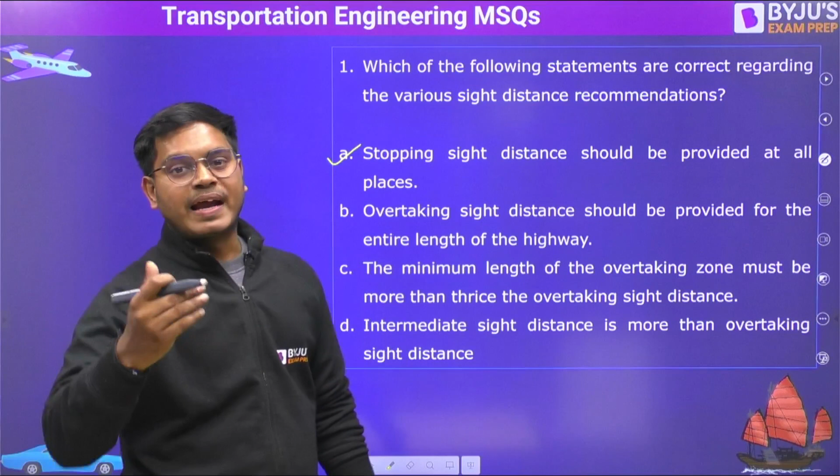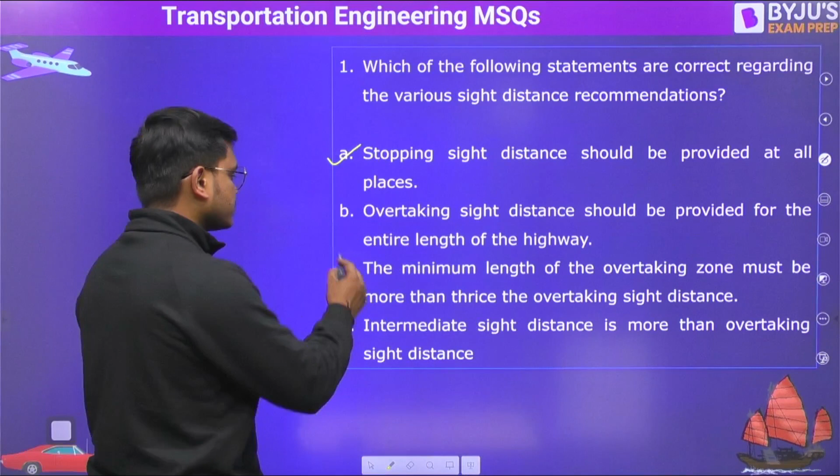Number 2, overtaking sight distance should be provided for the entire length of the highway - but overtaking sight distance is required only where needed, not everywhere, so this is not a correct option. Minimum length of the overtaking zone must be more than thrice the overtaking sight distance - that is also true. Desirable is 5 times, but minimum is thrice the OSD. Intermediate sight distance is actually less than the overtaking sight distance. I hope you have got the right answer for all these options.

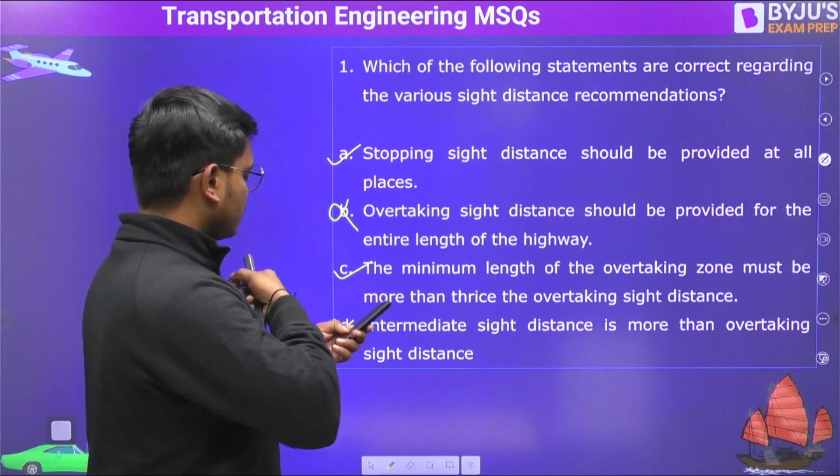Moving on to the next question: which of the following statements about the Bombay plan is correct? As you all know, there were 3 plans and the Bombay plan is one of them. Number 1, the road density is 82 kilometers per 100 square kilometers area.

So it is actually not true, because in the Bombay plan, the first one was in Nagpur, which had 16 kilometers per 100 kilometers square. Here you should have 32, not 82. So 32 is the answer, but this is the wrong option.

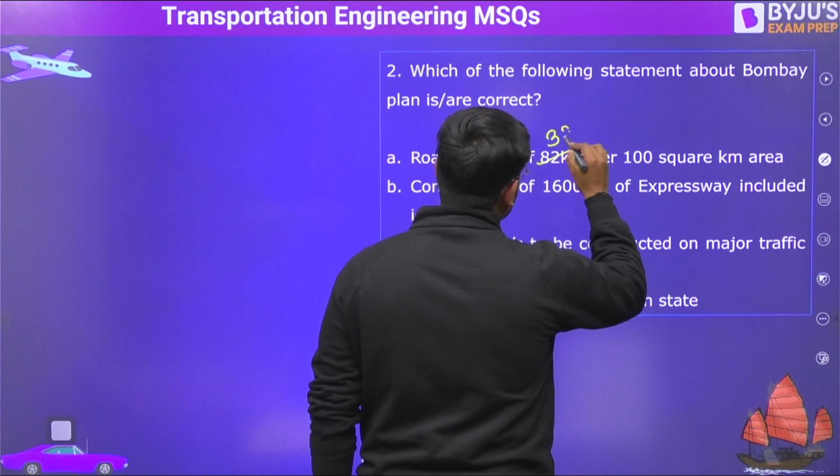Construction of 1600 kilometers of expressway is correct, because in the Nagpur plan there was no plan of having an expressway, but here they had the plan. Expressways to be constructed on major traffic corridors - this is not at all the right option. But traffic engineering cell in each state is going to be there - this is the point we generally don't discuss when studying transportation engineering. This is also right. So option B and option D are definitely correct.

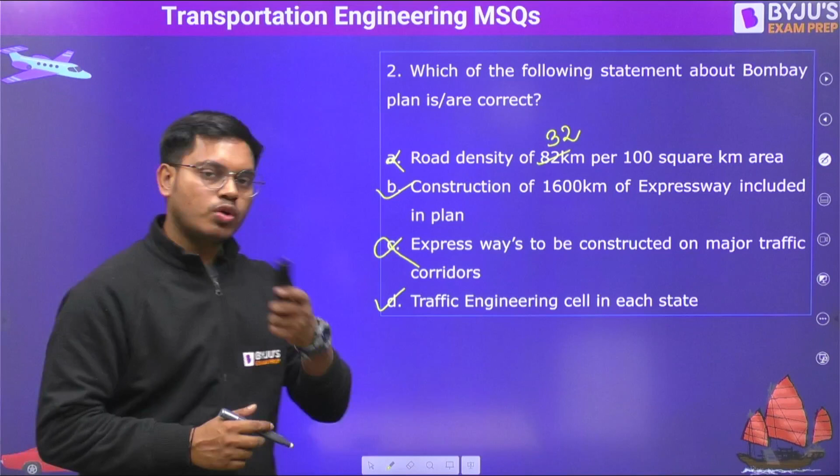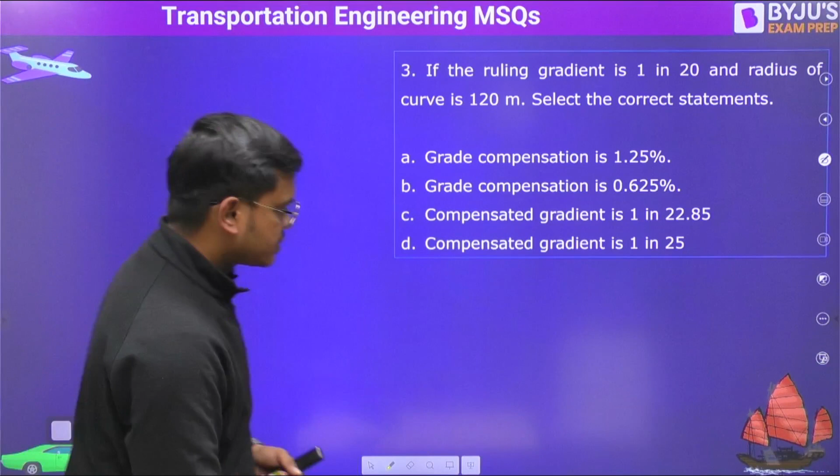Moving on to the next question - please pause the video and try to solve this. If the ruling gradient is 1 in 20 and radius of curve is 120 meters, select the correct statement. As you all know, there is this method, and you need to first find out the grade compensation, which is 30 plus r by r, or 75 by r, whichever gives you the minimum value is your grade compensation. So 30 plus r by r - radius is given to us. Radius of the curve is given as 120 meters. So please put this value and tell me what is going to be the answer. I'll also solve it with you, but you can pause the video and solve it yourself as well.

So it will be 150 by... giving us 1.25 and 0.625. These are the two values. Now, as I have discussed with you earlier, you have to consider the minimum one. So this is your grade compensation. But for that we need to first check the compensated gradient as well. Compensated gradient will be the present grade you are having, the ruling gradient, minus the grade compensation. Now you have how much?

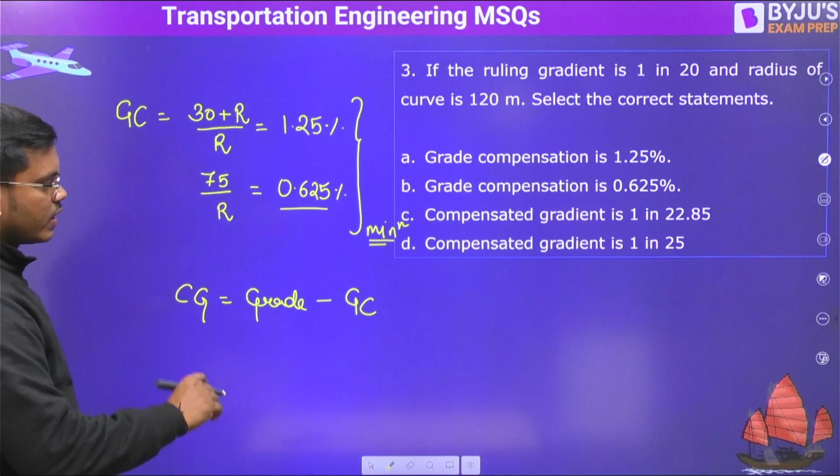1 in 20, right? So if you go for 1 in 20 and subtract 0.625 from that, you get the value as 4.375, which is greater than 4%. So obviously this is the right answer, there is no problem. 4.375 is also 1 by 22.85. So option C and option B are correct - grade compensation is correct and compensated grade is also correct. So these are the two options which are correct here.

Moving on to the fourth question, select the correct statement. When the vehicle is moving up gradient, braking distance decreases. When the vehicle is moving down gradient, braking distance increases. When the vehicle is moving up gradient, lag distance decreases. When the vehicle is moving up gradient, lag distance increases. So quickly try to answer this question - a very beautiful question it is. When the vehicle is moving up gradient, you can pause the video and try to answer it.

Now I'll tell you the correct answer. When the vehicle is moving up gradient, braking distance decreases - this is actually correct. When the vehicle is moving down gradient, the braking distance increases - true. When the vehicle is moving up gradient, lag distance decreases - lag distance is basically V into TR, there is nothing related to gradient in your lag distance, so obviously it has nothing to do with the gradient. That is why both of those statements are wrong. A and B are the right answer.

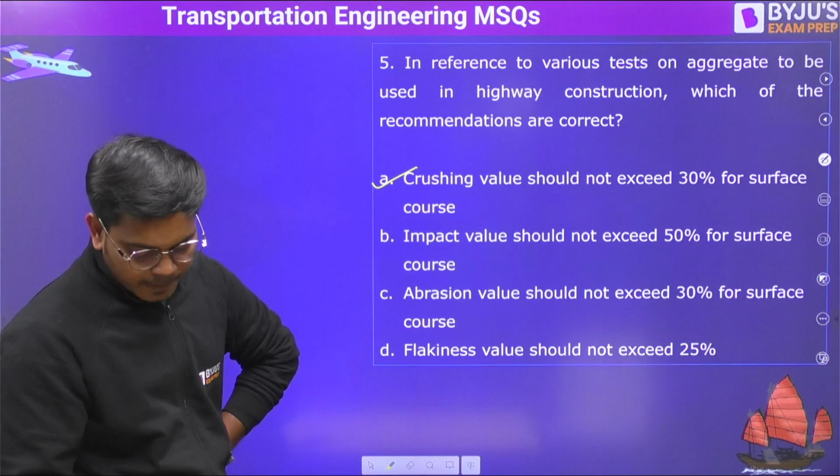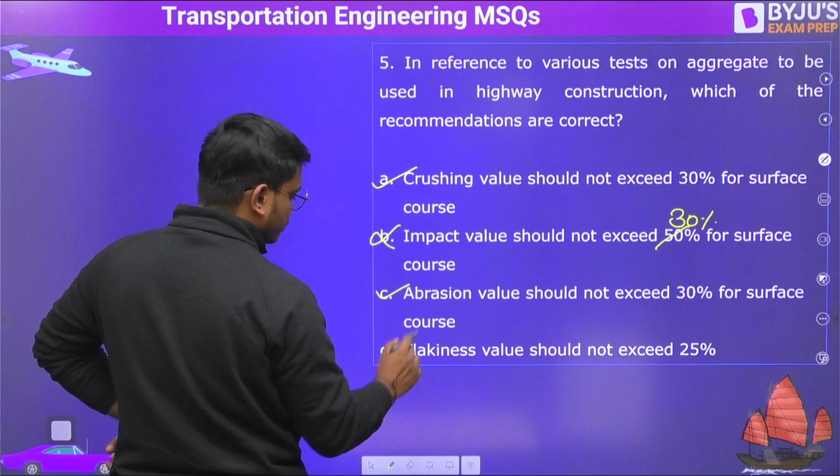Moving on to the next question, I have considered very minute type of questions, minute information which sometimes we lose, sometimes we miss, so maybe that's what is going to help you out in building your concept even more stronger.

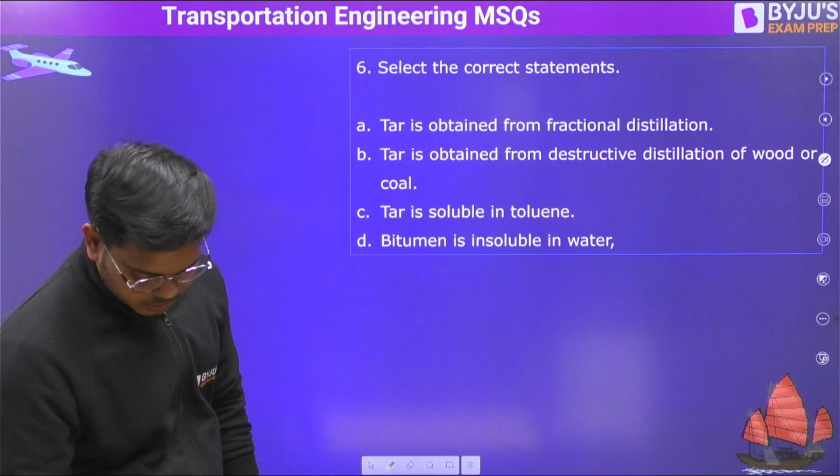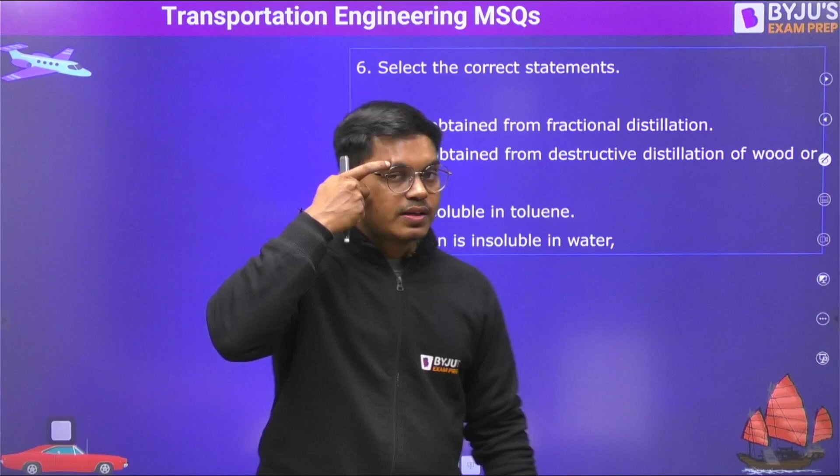Select the correct statement. Tar is obtained from fractional distillation, or tar is obtained from destructive distillation - so obviously A or B, one is right. Tar is soluble in toluene. Bitumen is insoluble in water. Quickly try to answer this. Tar is obtained from destructive distillation, fractional distillation is for bitumen. Tar is soluble in toluene, and yes, bitumen is insoluble in water - it is soluble in CCl4, or you can take benzene also.

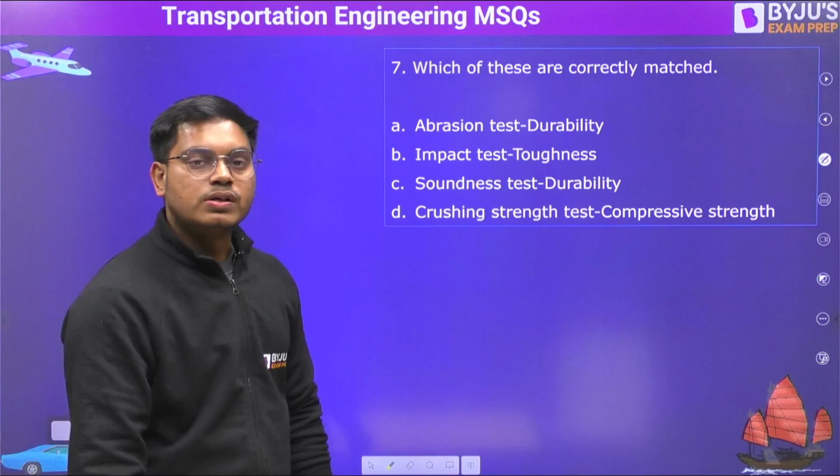Next, which of the following statements are correctly matched? Quickly look at this. Abrasion test - durability. I think the first one is wrong, right? Abrasion actually gives you hardness, so this is wrong. Impact is toughness. Soundness is durability. Crushing is compressive strength. B, C, D are the right options here.

Eighth question. The percent voids in mineral aggregate VMA and percent air voids in a compacted cylindrical bituminous mixed specimen are 15 and 4.5. Which of the following statements are correct? Percentage bitumen is 10.5%, or percentage bitumen is 12.5%. So what actually is VMA? VMA is the addition, or you can say collectively, of voids filled with air and voids filled with bitumen. So your bitumen VB percent is simple to find if you have these two values: 15 minus 4.5. So from here you get this - option A is correct here for the bitumen.

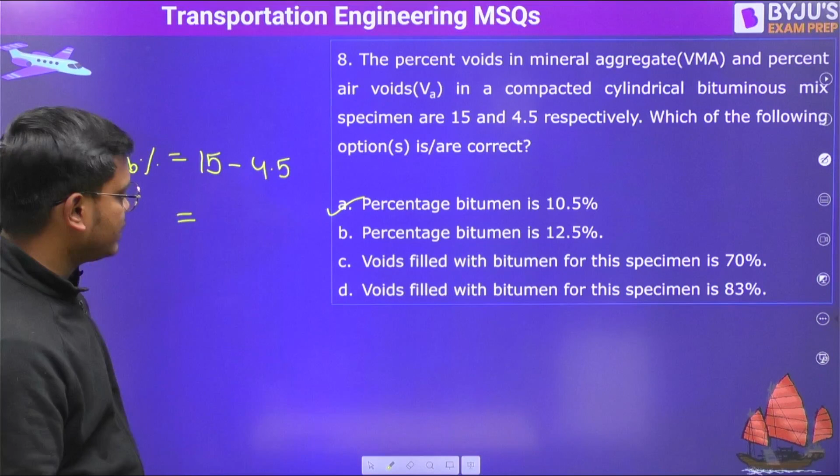And voids filled with bitumen for this specimen is 70%. You can find this out with the help of VFB, basically they are asking, right? So 10.5 is the VB value. So VB by VMA, that is 15, that is going to be somewhere around 70%. Option C is right here, yes, option C is definitely correct. So I hope you have got this answer.

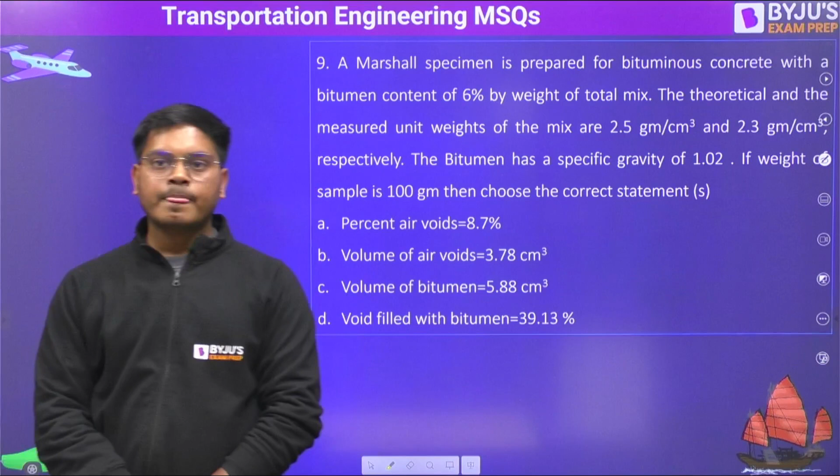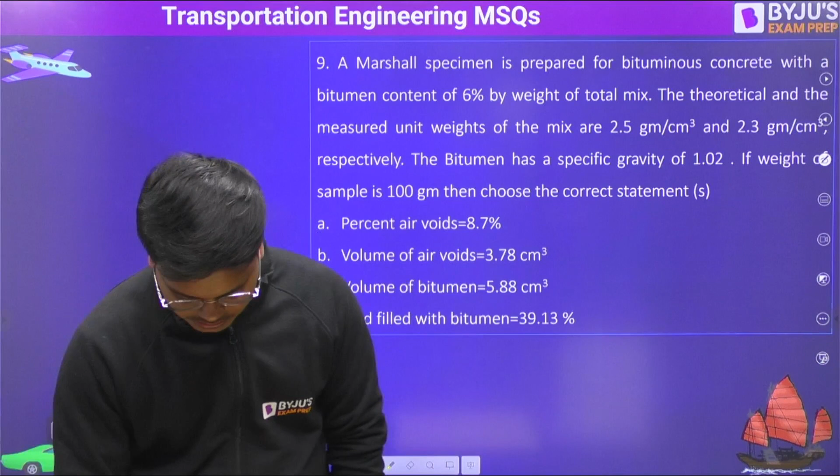Ninth question. A Marshall specimen is prepared for bituminous concrete with a bitumen content of 6% by weight of total mix. The theoretical and measured unit weights of the mix are 2.5 grams per centimeter cube and 2.3 grams per centimeter cube respectively. The bitumen has a specific gravity of 1.02. If the weight sample is 100 grams, then choose the correct statement. Try to answer this.

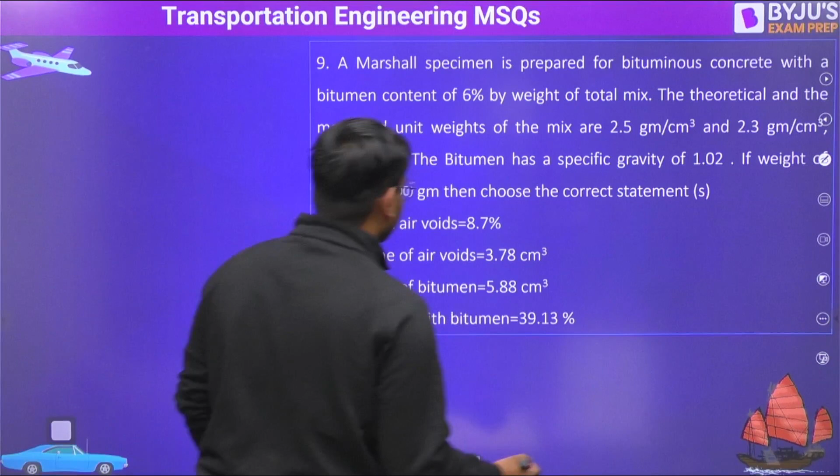So the number one thing we need is the value of percentage air voids, basically VA, right? So for that I think we have the required information: GT minus GM by GT.

Put the values, you have 2.5 and 2.3 here. So 2.5 minus 2.3, divided by 2.5, into 100. When you solve it, you get the value, as I have already solved it, it is 8.7%. Option A is definitely correct.

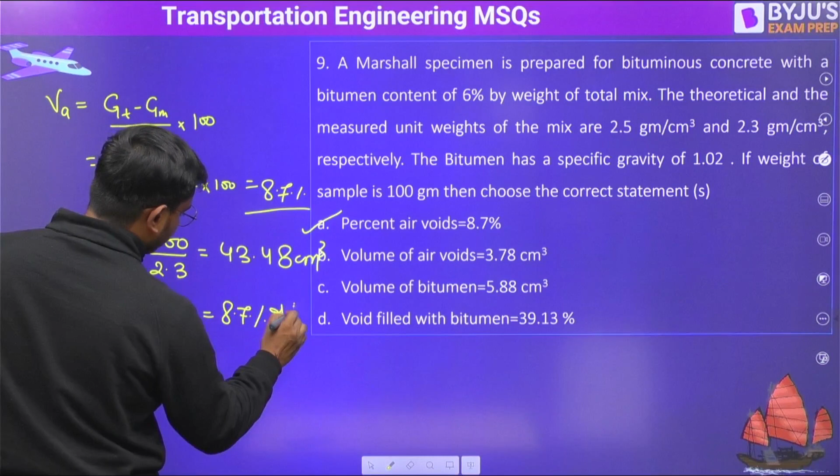Volume of air voids - how much is it? First we need to check the total volume. Volume equals 100 upon the weight, and the unit weight is 2.3. So the total volume is 43.48 centimeter cube, and we know it is 8.7% of it. So 8.7% of V will be the volume of air: 8.7 of 43.48. When you solve this, you get the answer as 3.78 centimeter cube. This option is also correct.

Volume of bitumen - how much is the weight? Is it given to us? 6% is given to us, and it has a specific gravity of 1.02. So 6 upon 1.02, it will be somewhere around 5.88 only, right? That is also correct.

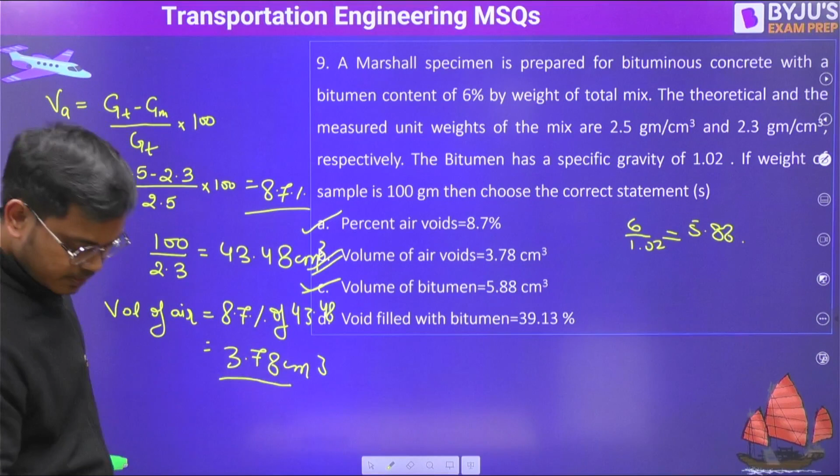Now voids filled with bitumen. Voids filled with bitumen means VB upon VB plus VA. So when you get it, what is it going to be? For that I need to get the value of VB, right? So how to get VB? Is it given to us? No. We know it is 6% by weight of the total mix, right? So from there we can also use the information about the air voids. Volume of air voids is 3.78, correct?

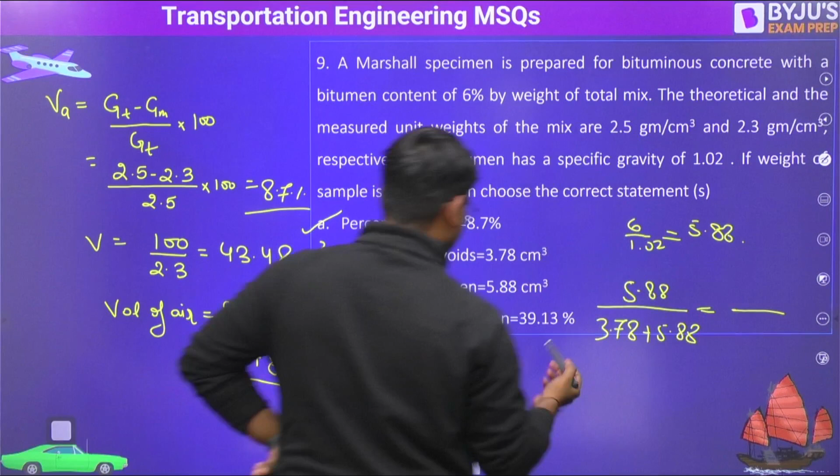Yeah, so let's put this value here as 5.88. Let's take the value in terms of volume only. So 3.78 plus 5.88 - you tell me if this is correct or not. For me, A, B, C are correct. D, I have no idea. You are the one who is going to tell me if option D is right or not. This is your homework for this particular video.

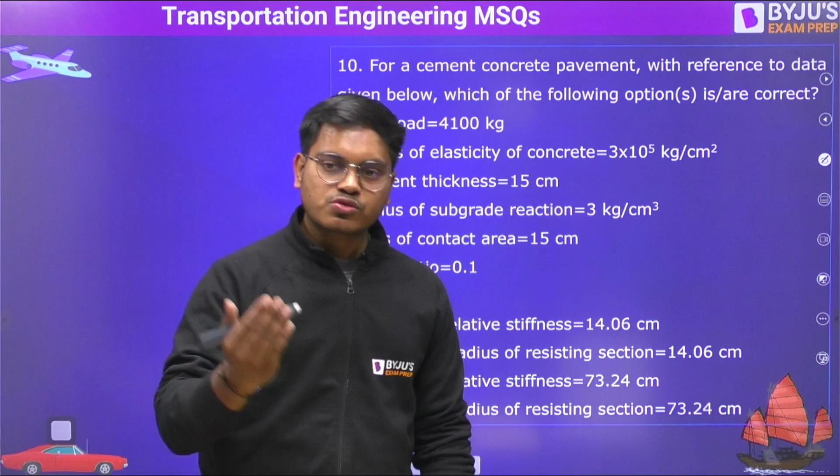Moving on to the next question. For a cement concrete pavement, with reference to the data given below, which of the following is correct? Wheel load is given, modulus of elasticity of concrete is given, pavement thickness is given, modulus of subgrade reaction is given, radius of contact area is also given, and Poisson ratio is also given as 0.1. All you need to do is find out the radius of relative stiffness and equivalent radius of resisting section. Please pause the video, solve it, and tell me how much you are getting.

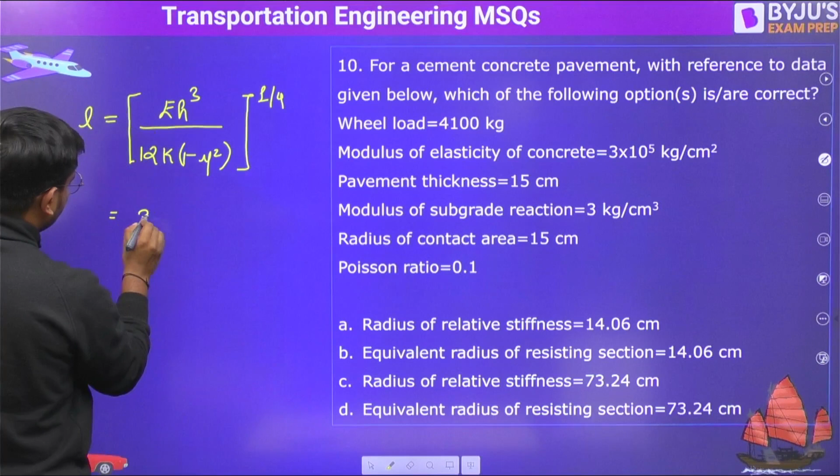Okay, I hope you are done with this. So how much are you going to get for the radius? EH cube by 12K, into 1 minus mu square, by 1 by 4. Put the values here - all the values are given to you. 3 into 10 raised to power 5. How much is the thickness? It is given as 15. Into 12, into K is given as 3. 1 minus 0.1 square, power 1 by 4. I will not waste your time by solving this - I already have the answer. It is 73.24.

And you need to find out the equivalent radius. So whether it must be 14.06 or it is going to be 73.24. See, by the logic also you can solve it, because you have already solved something and got this answer - it is very rare that they are going to be the same. As you can see, these two values and these two values.

Sometimes if you have less time, then also you can answer, because MSQ have zero negative marking. There is no negative marking, right? So you can also go for it. But we'll see the solution.

It equals how much? Let me write down here, under root 1.6.

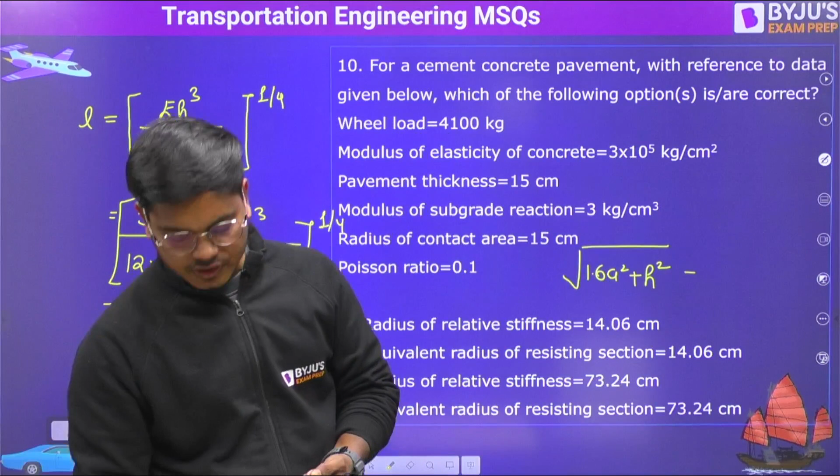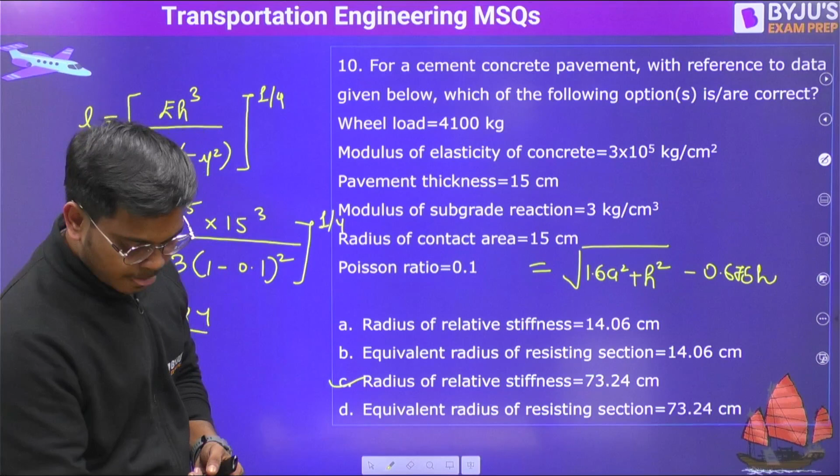So when you solve it, it comes out, as I have told you, 14.06. So B and C are the right answers for this question. Next question is, which of the following statements are correct related to different layers in flexible pavement?

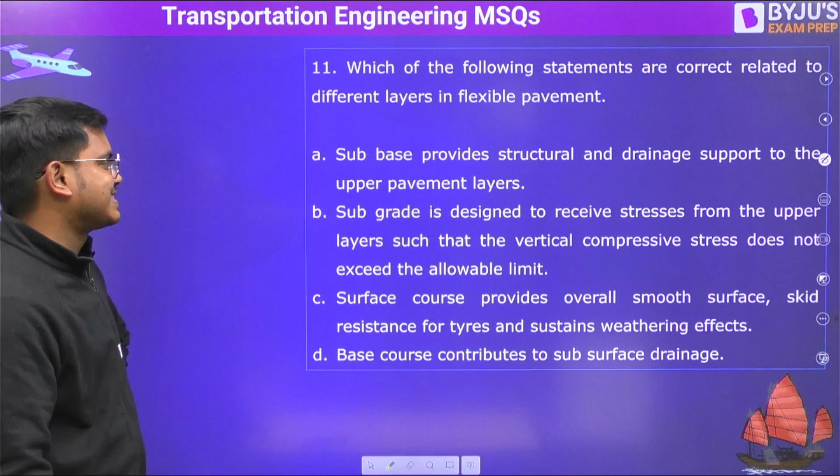So these are the four options. Please pause the video and try to answer this question. Subbase provides structural and drainage support to the upper pavement, or subgrade is designed to receive stress from the upper layer such that the vertical compressive stress does not exceed the allowable limit. Surface course is this, base course is this. So answer is A, B and C, D.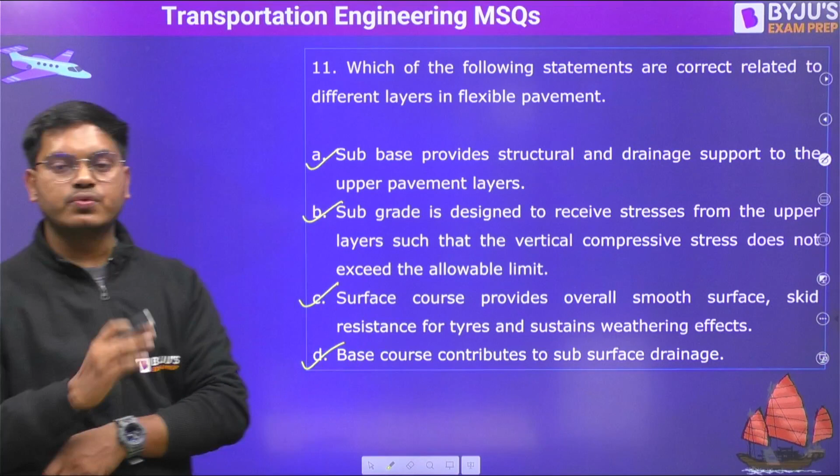One question gave you four important pieces of information. Remember this, note it down in your notes if you don't have it yet.

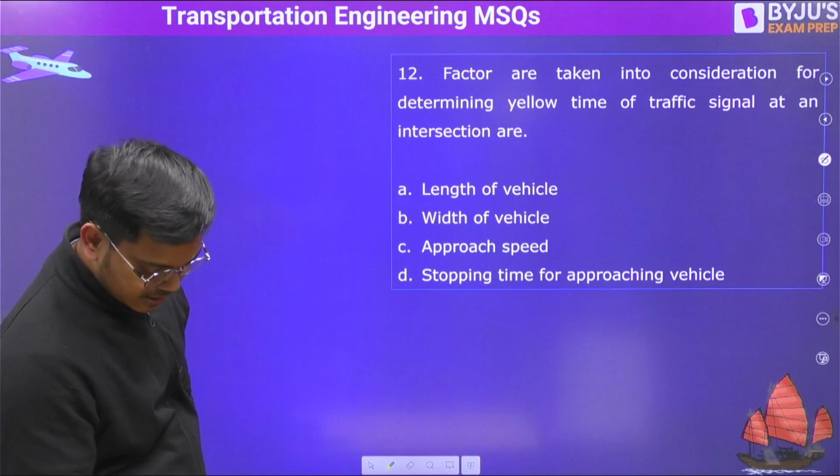Next, factors taken into consideration for determining the yellow time of the traffic signal at an intersection are: please pause the video and try to answer. Length of the vehicle, true. Width of the vehicle, no. Approach speed, true. Stopping time is also correct for the approaching vehicle.

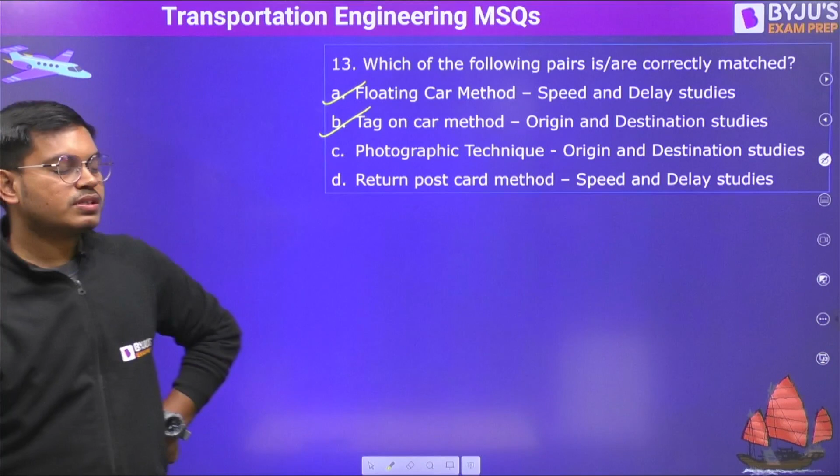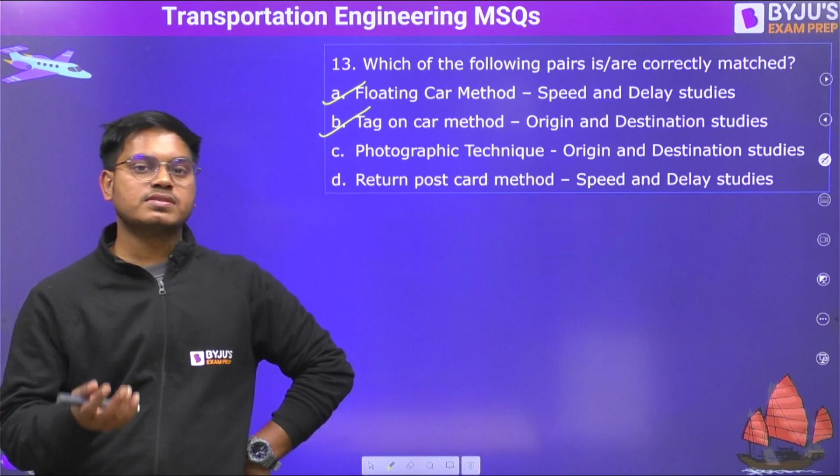This question, a similar question was also asked in the GATE examination, I think last year only, which just happened, 2022, right? So earlier we used to leave this type of topic when studying, but now I recommend please don't do that. I have also discussed this a lot in my classes, and I want all of you to remember which method is used for doing what particular thing.

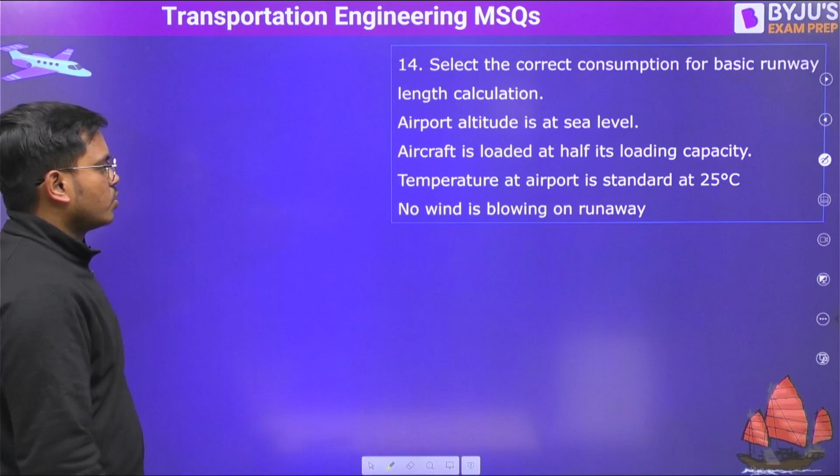Moving on to the next question, select the correct assumption for the basic runway length calculation. So options are missing here. It is A, this is B, this is C, this is D. Obviously this is very obvious, so try to answer everyone which of these are the assumptions when deciding the runway length.

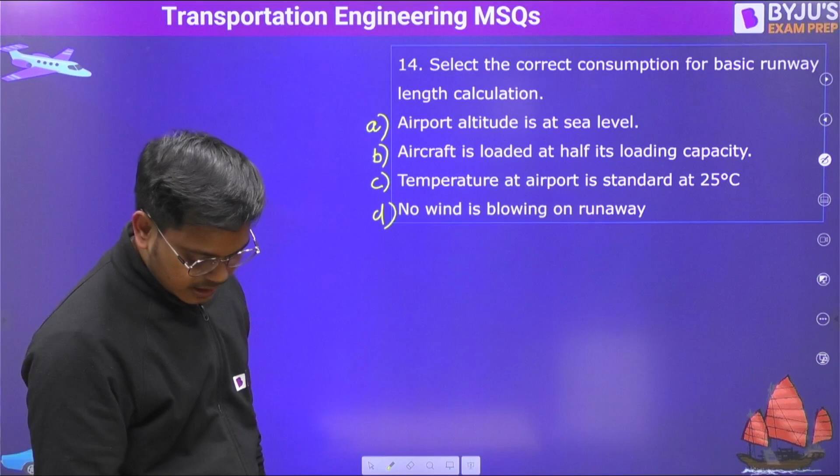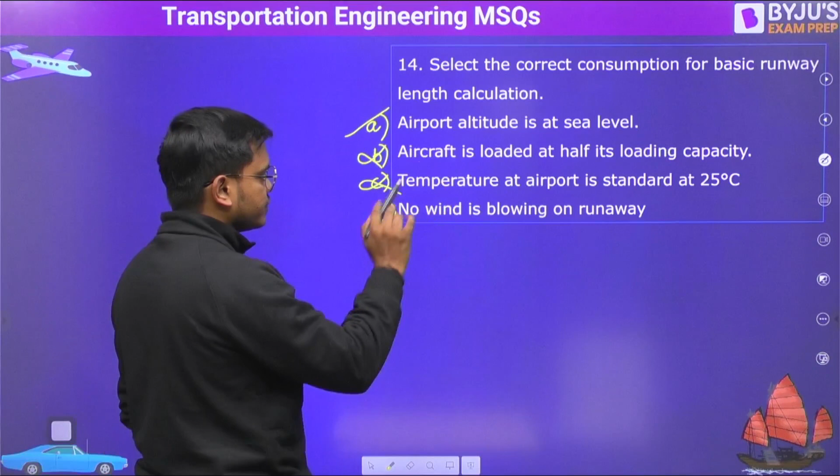Airport altitude is at sea level, true, that is correct, that is why you put the correction, right? Aircraft is at half its loading, no, we consider it as fully loaded. Temperature is standard, no, it is not 25, it is 15. No wind blowing, that is also correct. A and D are the right answer to this question.

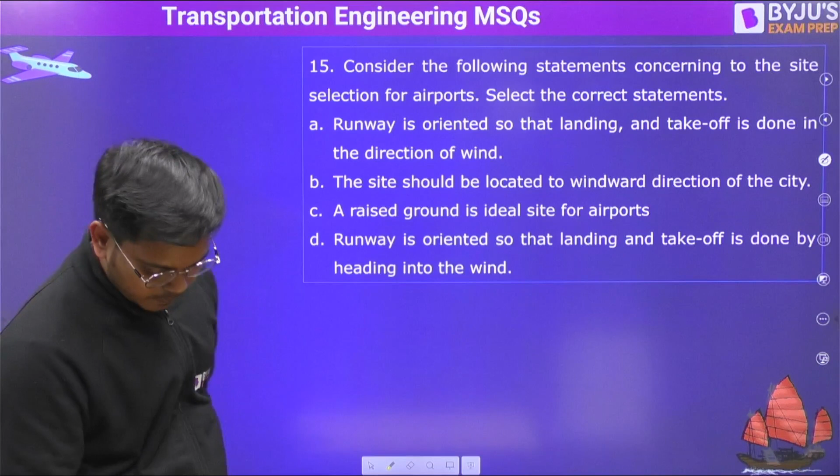Runway is oriented so that landing and takeoff is done in the direction of the wind. The site should be located to the windward direction of the city. A raised ground is the ideal site for an airport. Runway is oriented so that landing and takeoff is done by heading into the winds.

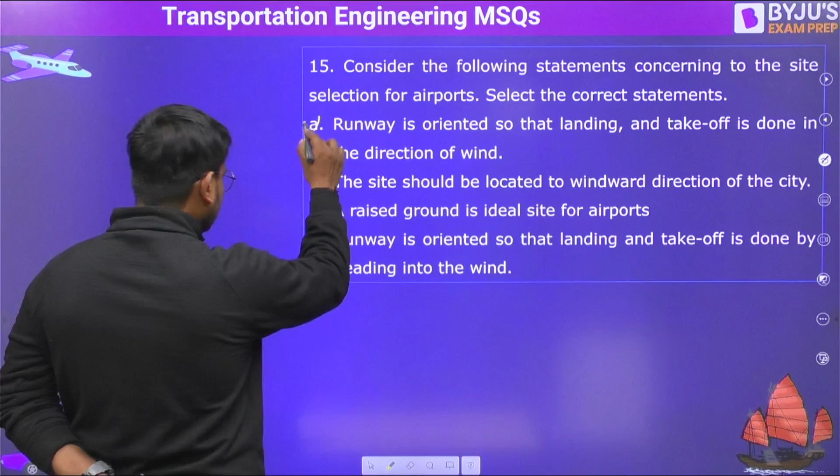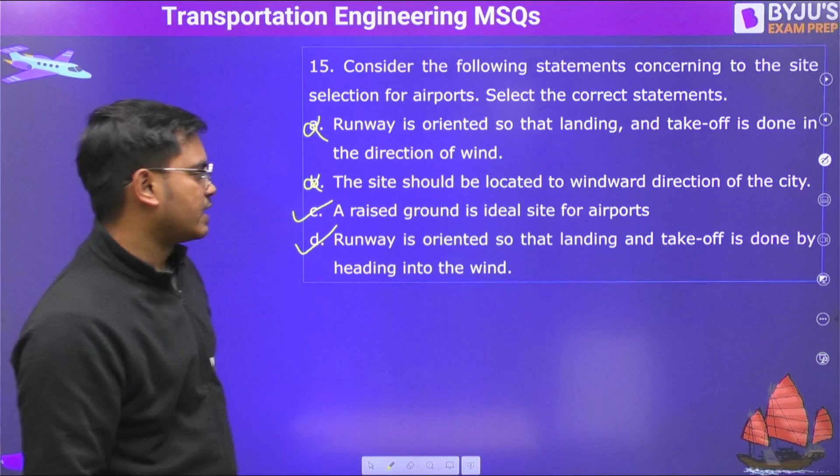So these two would be very dangerous for us, right? So yes, we will take care of this one thing, that it should be raised, so that there are no drainage issues we face, and it should be easily visible. And second, the runway is oriented so that landing and takeoff is done heading into the winds, that is more appropriate.

So these were the 16 questions from Transportation Engineering as MSQ that you can expect in your GATE examination.